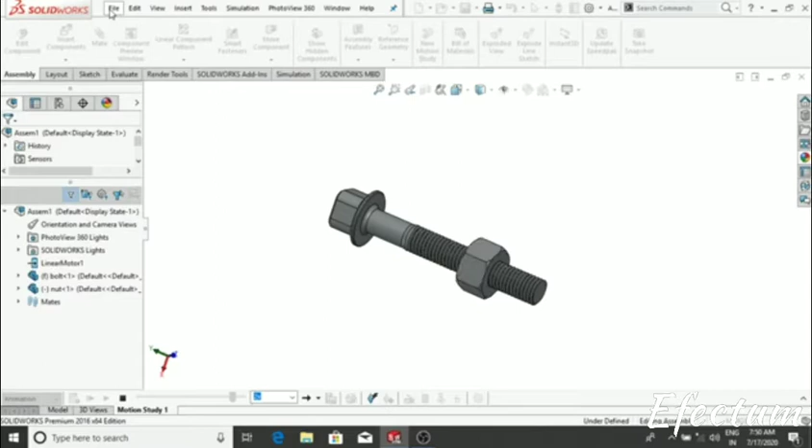So let's start the drawing. First of all, go to the file, new, select part, then OK, and we enter the SolidWorks interface.

Let's change the background to plain white. Simply click and make it plain white, and make the drawing on the top plane.

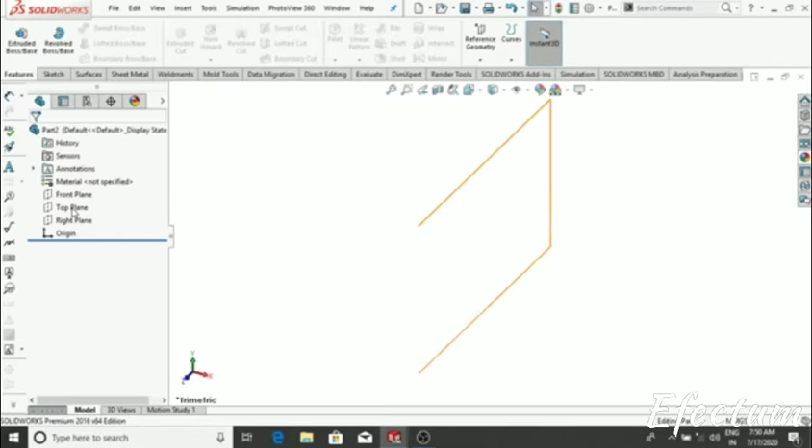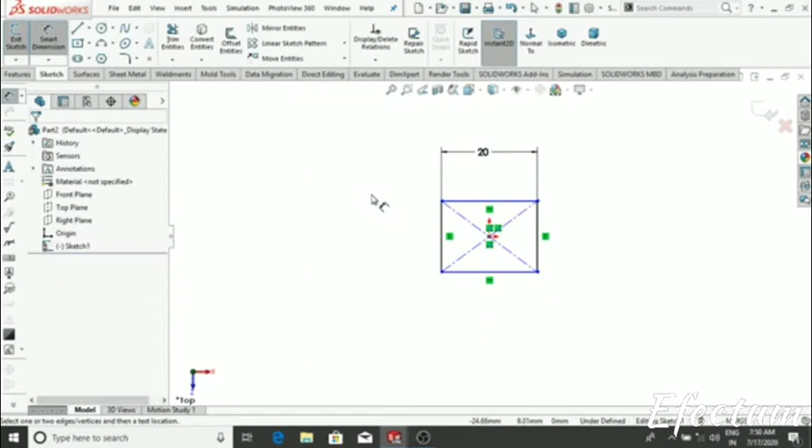Select the top plane, right click, sketch, and make the center rectangle of 20 mm into 20 mm. Simply select the center rectangle and go to smart dimension, make it 20 mm, OK, and it also be 20 mm.

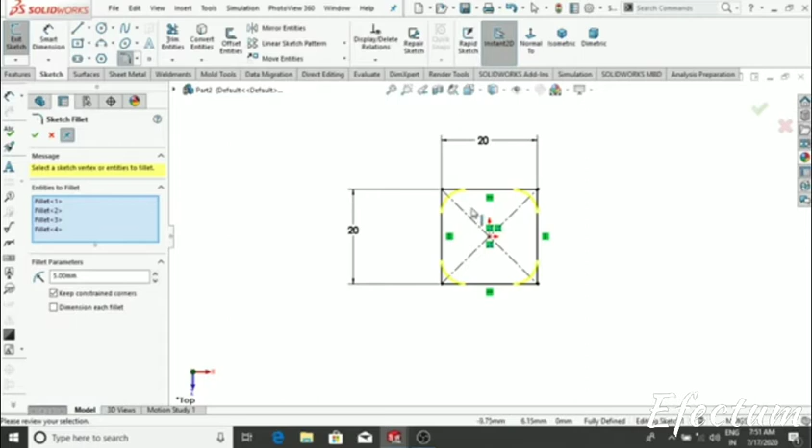Then OK, and give the fillet of 5 mm. Simply select 5 mm. If you want to select all the corners, simply drag the mouse and select this - it will automatically select all the corners, then OK.

Extrude up to 15 mm. Simply go to the feature, extrude boss base, and it will be 15 mm, then OK.

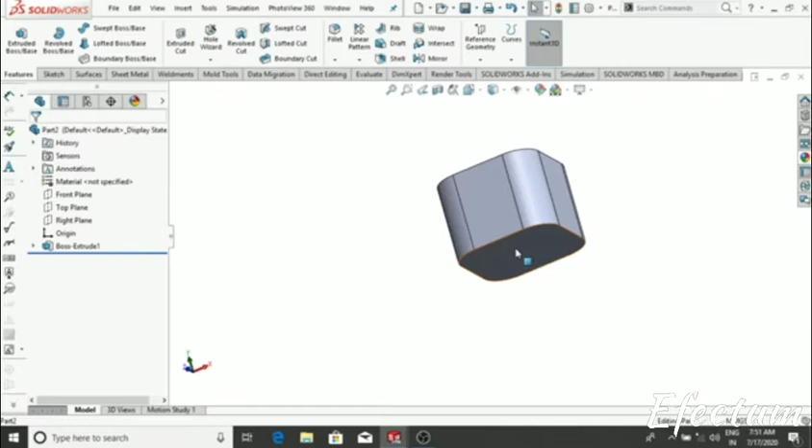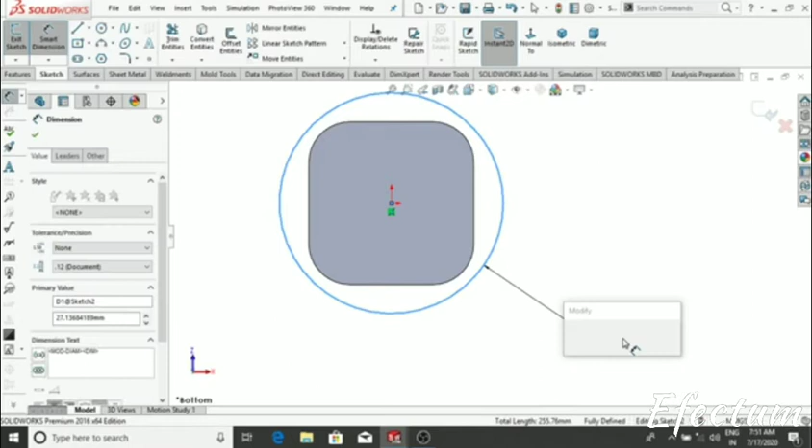Again from this face select, right click, sketch, then normal, and make the circle of 30 mm. Go to the circle and make the circle of 30 mm, go to smart dimension, and make it, then extrude up to 2 mm from this surface.

Go to the feature and extrude boss base 2 mm, and keep the merge result, then OK.

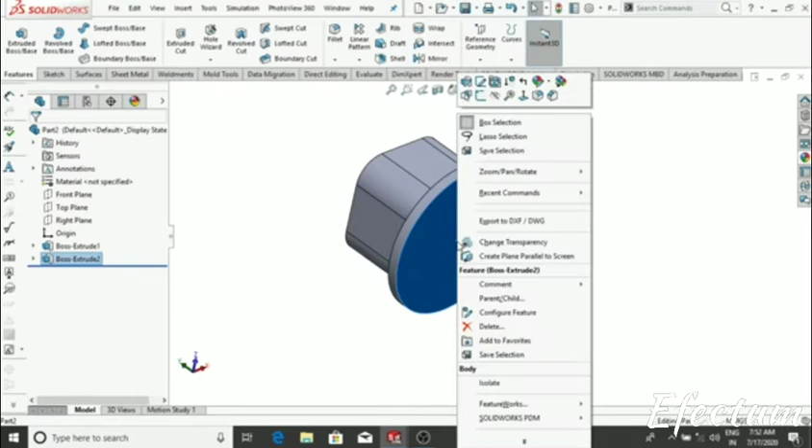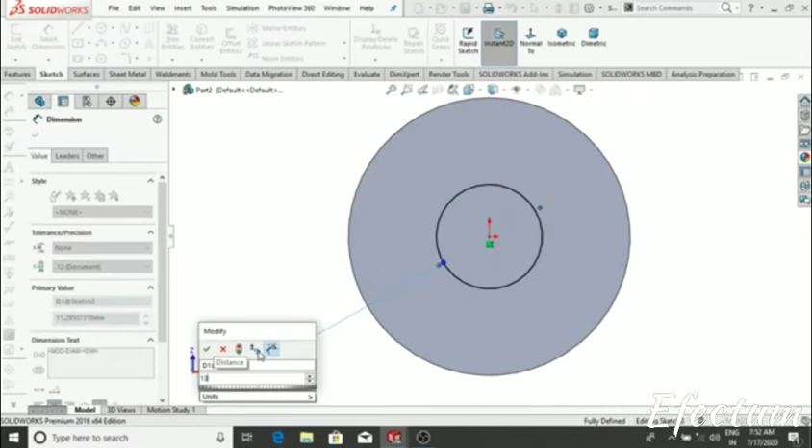Again from this surface make the circle of 13 mm. Simply select this surface and make the circle, go to normal, 13 mm. Simply select the circle and make it 13 mm. Go to smart dimension and make it 13 mm, then OK.

It's extruded up to 100 mm from this surface. Simply go to the features and extrude boss base 100 mm, then OK.

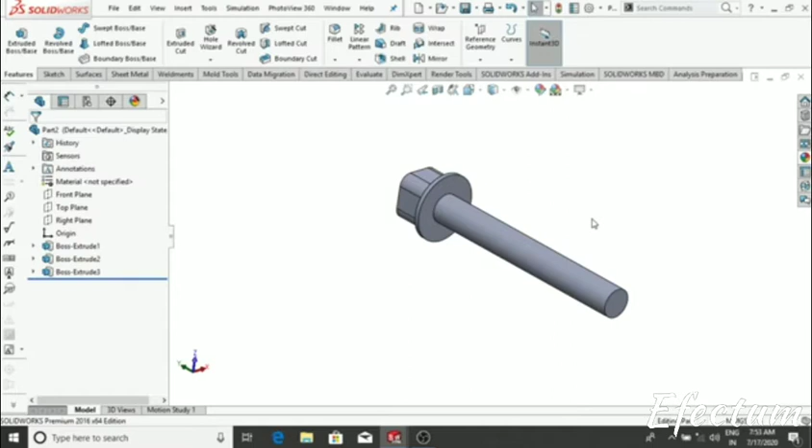Again from this surface make the circle of 14 mm, but its length will be 75 mm. Simply select this face, right click, sketch, then normal, and make the circle of 14 mm. Go to smart dimension and make it 14 mm, then OK.

It extrudes up to 75 mm. Simply go to extrude boss base and make it 75 mm, but it is reverse direction. Select the reverse direction, then OK.

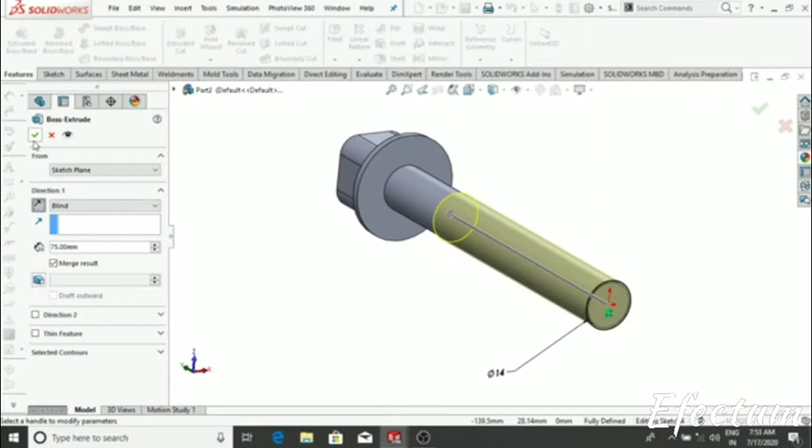Give the fillet of this line from this surface will be 1.5 mm. Go to the fillet and make it 1.5 mm on this surface, then OK.

Make this fillet to 0.5 mm. Simply select the fillet and make it 0.5 mm, and select both, then OK.

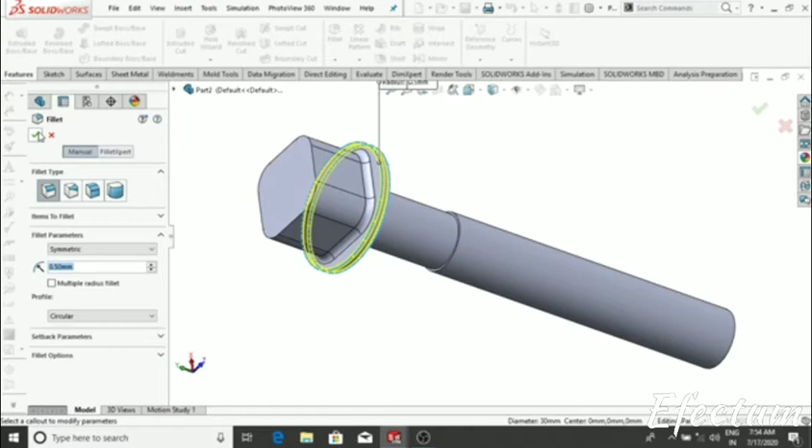Give the chamfer outward. Simply select the chamfer and make it 1 mm at this point. Simply select 1 mm and select this, then in, then OK. It will be automatically selected.

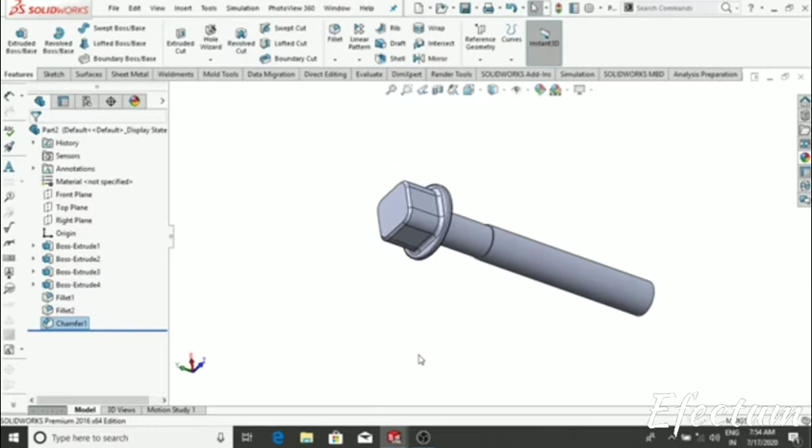After all, give the thread command to this bolt. Simply go to the hole wizard and select the thread.

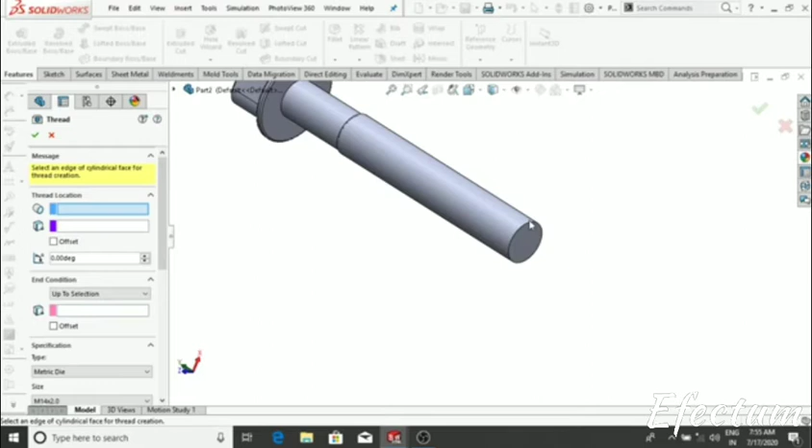Now thread location, simply select this corner, then OK. It will be M14 into 2.0 - it means the pitch between the threads will be 2 points and its diameter will be 14.

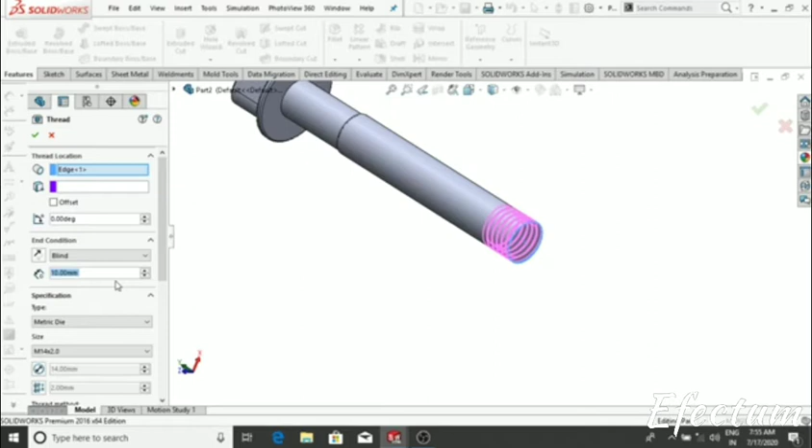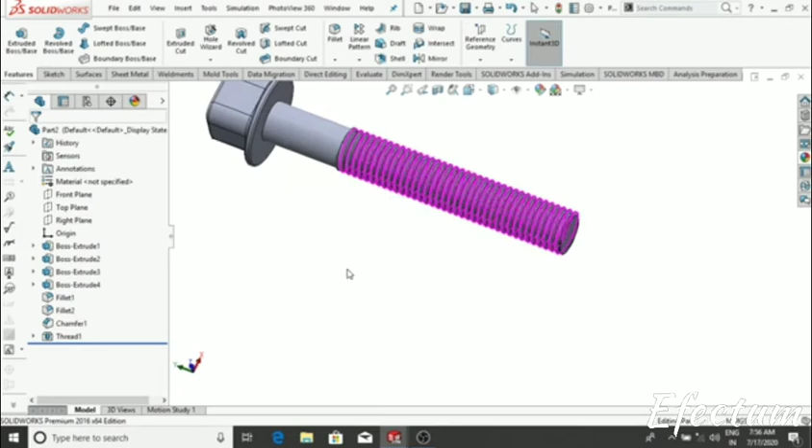Simply select blind and make it 78 mm. Select 78 mm and give the offset of 5 mm, then OK, but it is reverse direction, then OK. It will be thread from this surface, and again from this surface I will make the extrude through all.

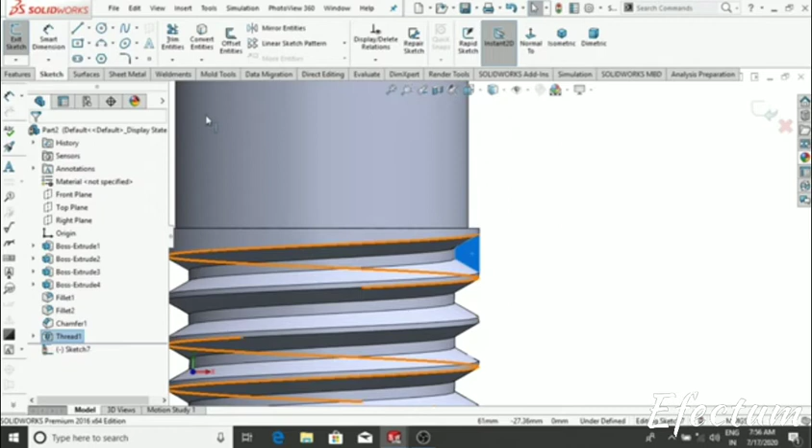Simply select this surface, right click, sketch, then normal. If you want to make this convert entity, simply go to convert entity - it will select the line from this surface.

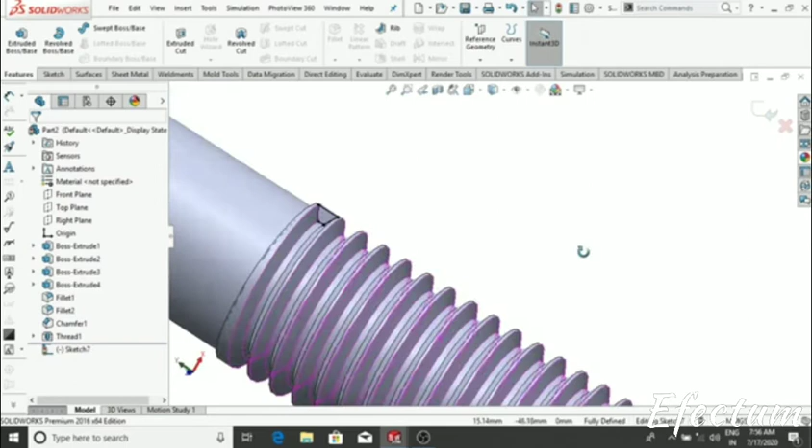Go to the feature and extrude cut through all. Go to the feature and extrude cut, select this through all, then OK. It will be cut from this surface, so OK.

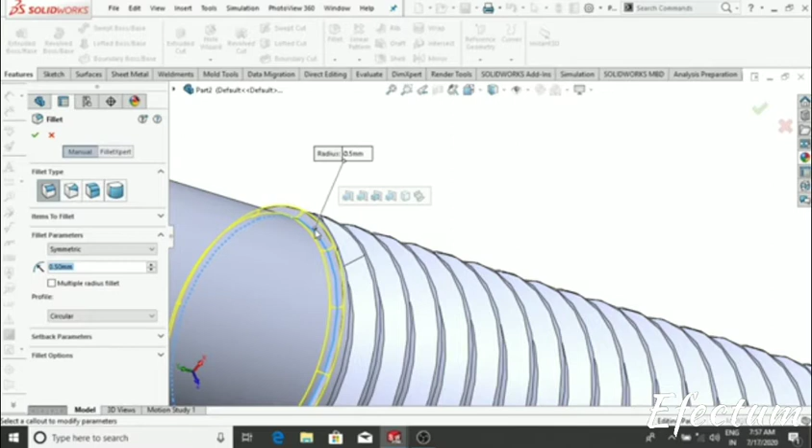Make the fillet from this surface 0.5 mm, then OK.

Again give the fillet from this surface. Simply select the fillet and make the fillet 2 mm, and select this corner, then OK.

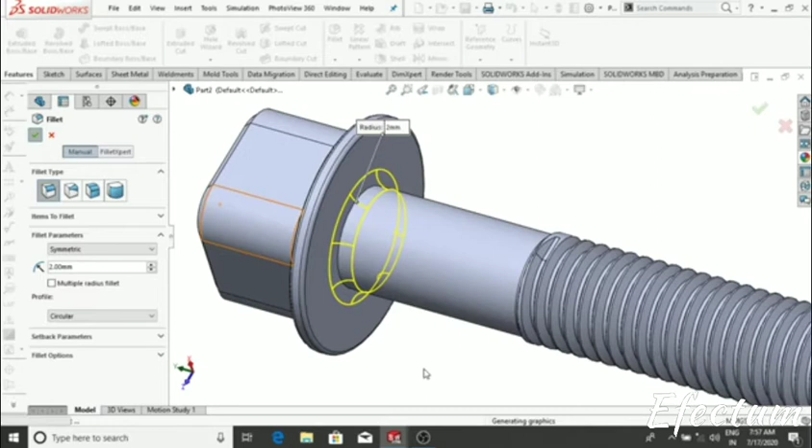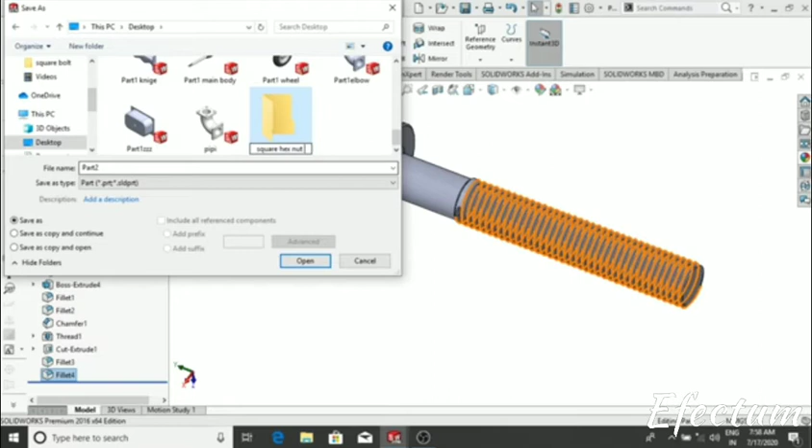Again we design the bolt, so simply design the nut. Save this first. Go to the file, save as, go to desktop and select the folder, make it square hex nut bolt, then OK, and it will be bolt, then OK.

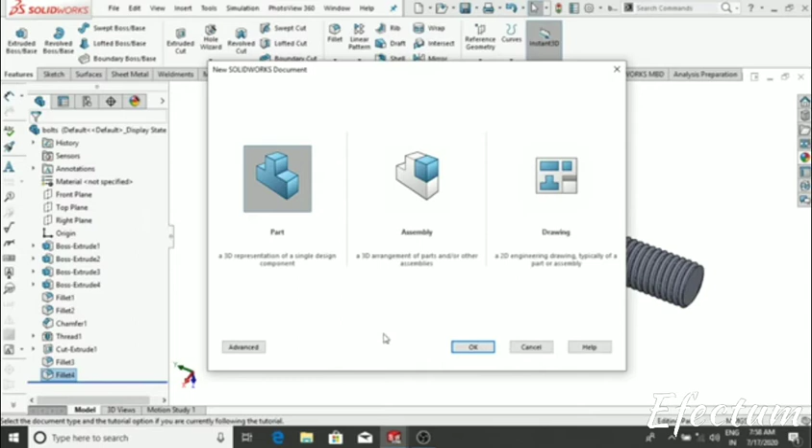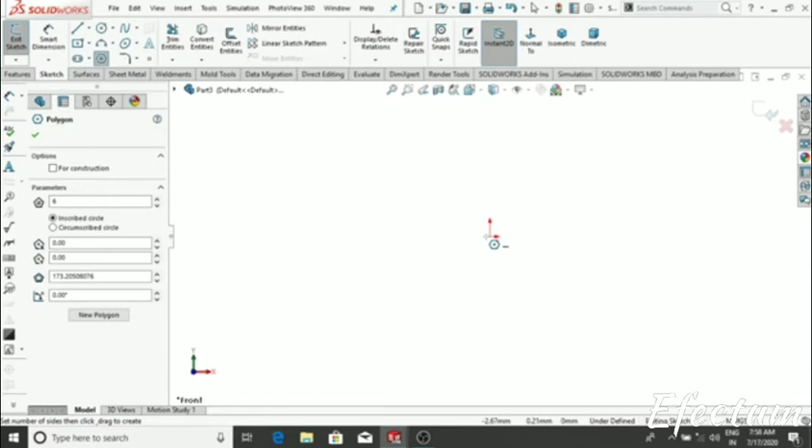So again make the nut for this bolt. Go to the file, select new and make the part, then OK. Change the background to plain white, select the front plane, sketch, then normal, and simply select the polygon. Number of parameters will be 6 and make the polygon. I think it will be horizontal.

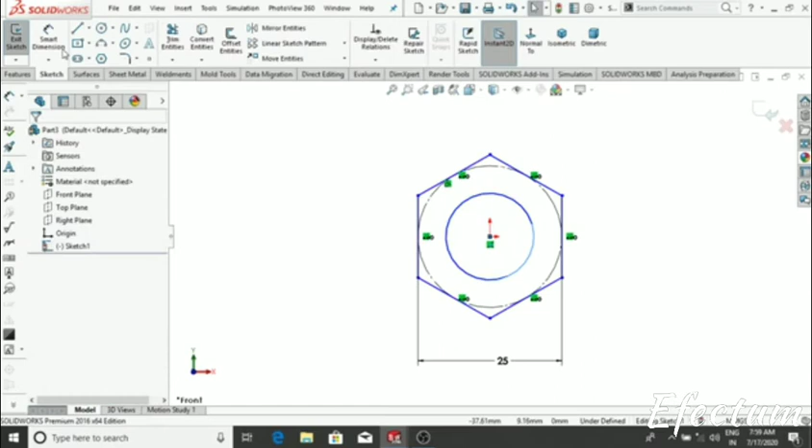Select this and make it horizontal, and the distance between the polygon between two lines, select the smart dimension, and from this point to this point will be 25 mm. Select 25 mm and make the circle from this point will be 14 mm. Select this, go to the smart dimension and make it 14 mm, then OK.

Again extrude it to 15 mm. Simply go to the features, extrude boss base, 15 mm, but it will be from mid plane, so select the direction will be mid plane, then OK.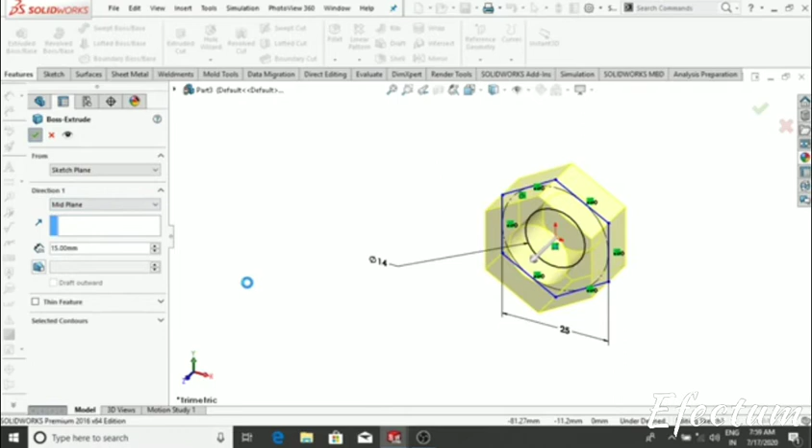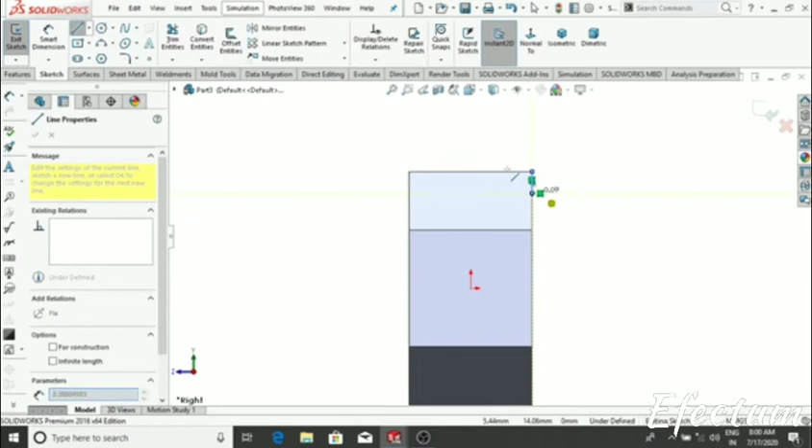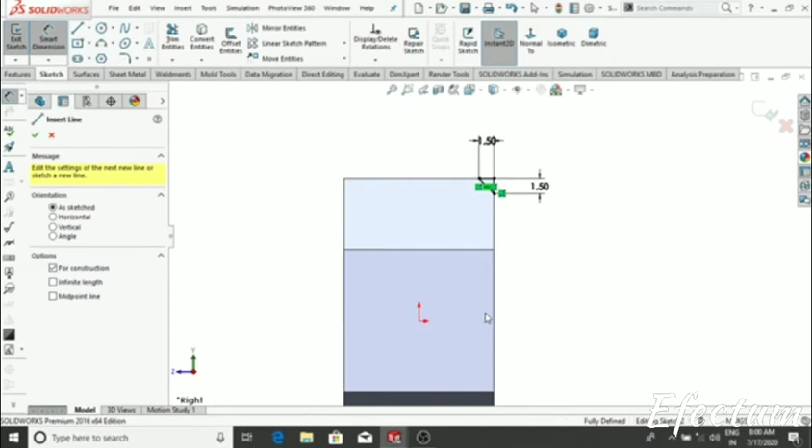Then select the right plane, right click, sketch, then normal, and make the cutout from the corners 1.5 mm. Select the line and make it, and go to the smart dimension and make it 1.5, then OK, and it also be 1.5, OK. Make the center line from this axis because it helps to revolve cut. Go to the feature, revolve cut, select automatically this axis, then OK.

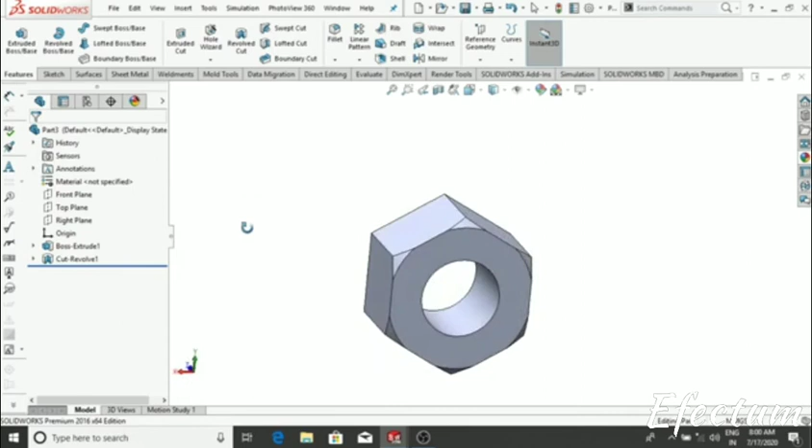If you want to mirror this cut, revolve cut two, simply go to the mirror and select the front plane and features to mirror, select this revolve cut and then OK, it will be mirror.

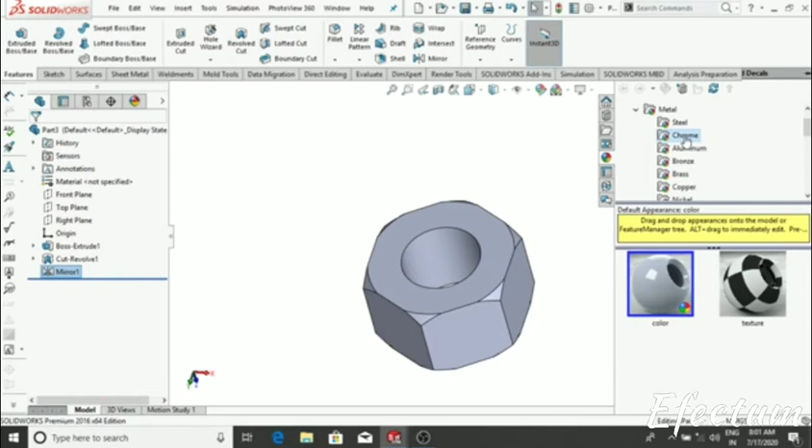Then if you want to apply the material to this nut, simply go to the appearance and select the metal, select chrome plate, then OK. We also give the appearance for this bolt, select this and make it chromium plate, then OK.

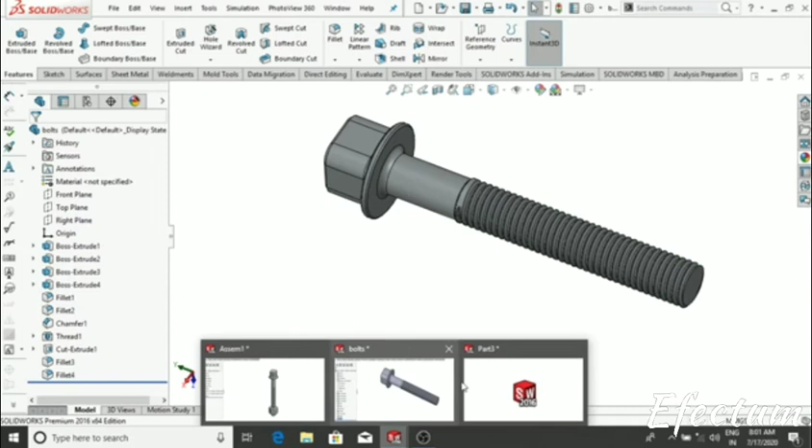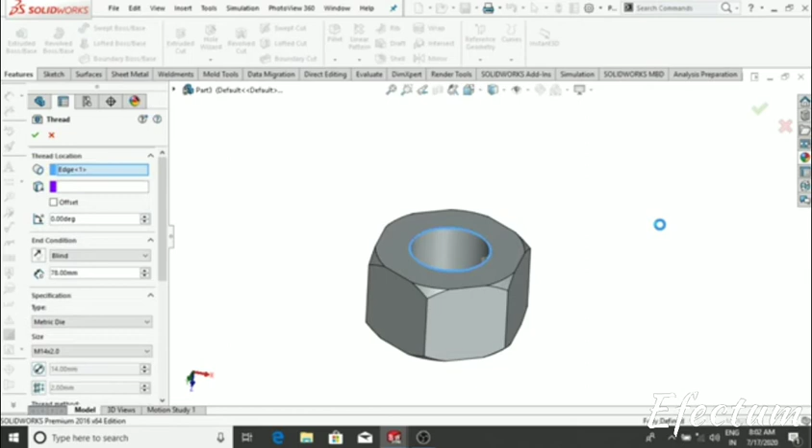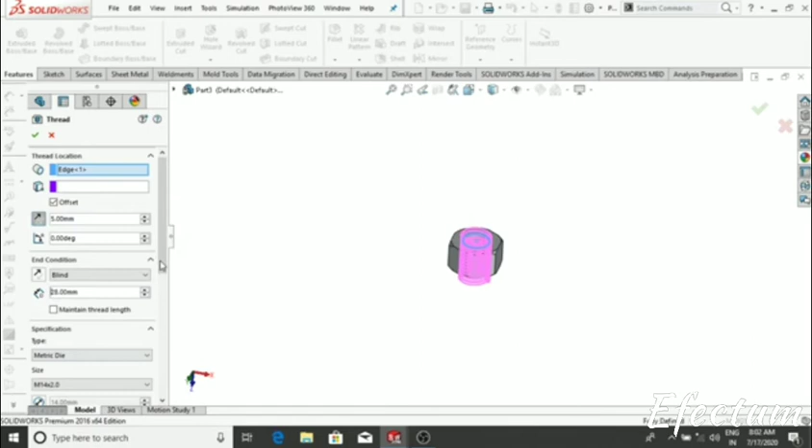Again give the thread to this nut, go to the features and hole wizard and go to the thread, select the location, select this. It will be more, so click this and make the offset of 5 mm, but it will be reverse, and give this and make it cut extrude, then OK.

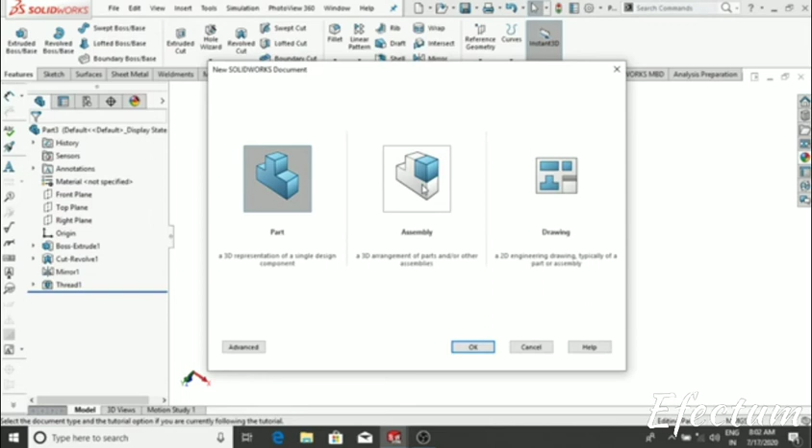Then it will be extruded cut from this surface, and we make the animation for this nut and bolt. Go to the file, new, and make the assembly for this nut and bolt, then OK.

We entered the assembly features in SolidWorks, select the bolt, drag it, and change the background to plain white, go to the insert components, click browse.

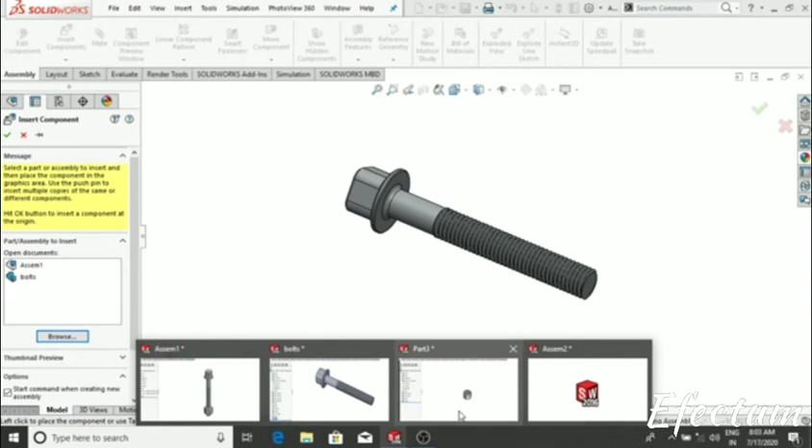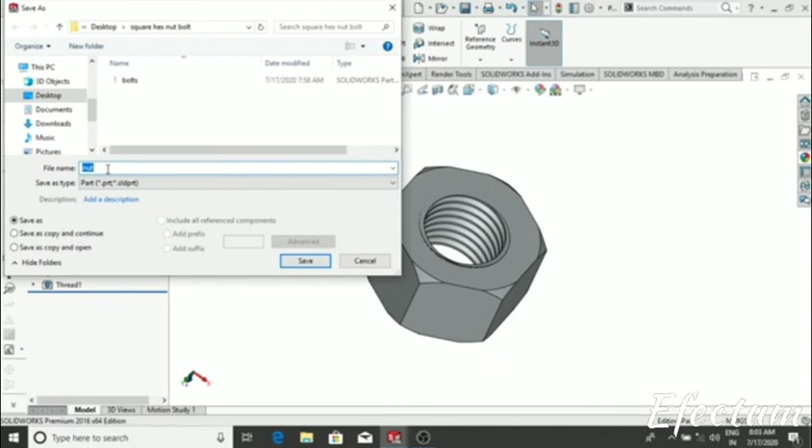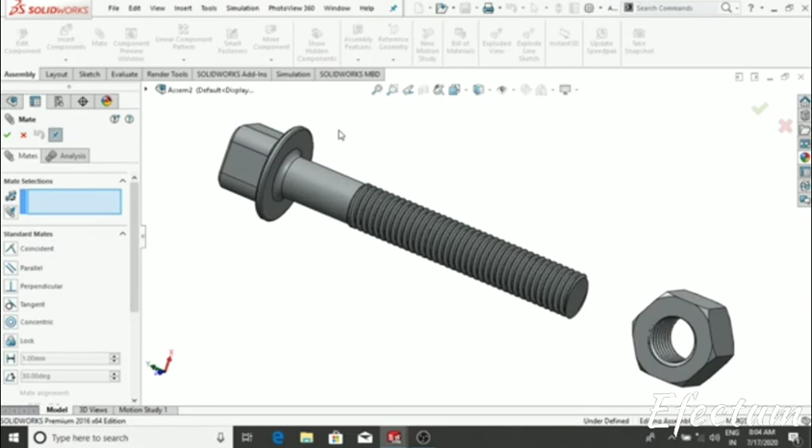Go to the assembly and go to the insert component and select this to this, and go to the mate, select this circle, and again select this circle, it will be concentric.

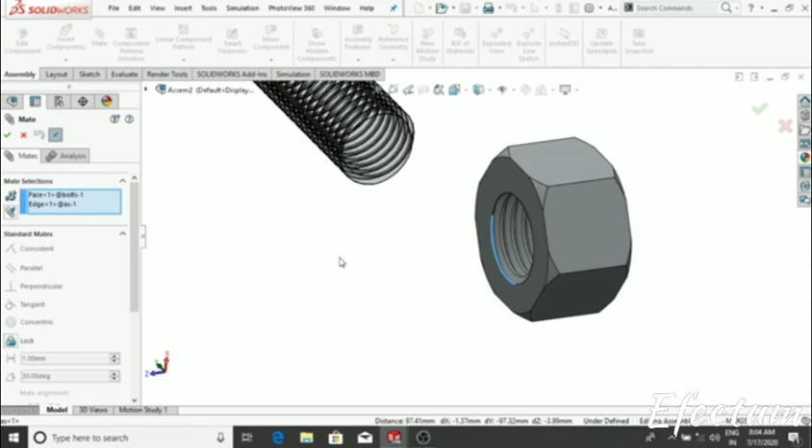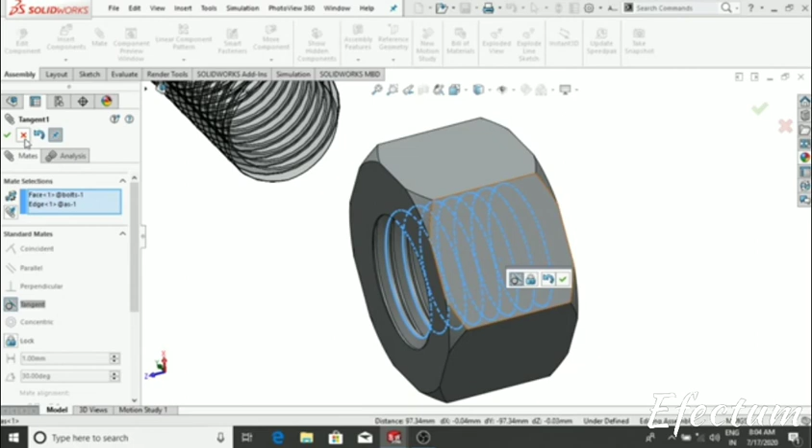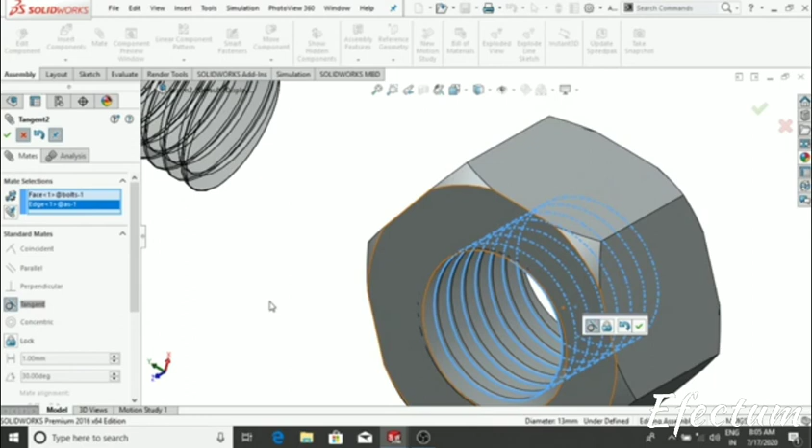Go to the mate, select this and select this. Sorry, it will not be selected the circle of this.

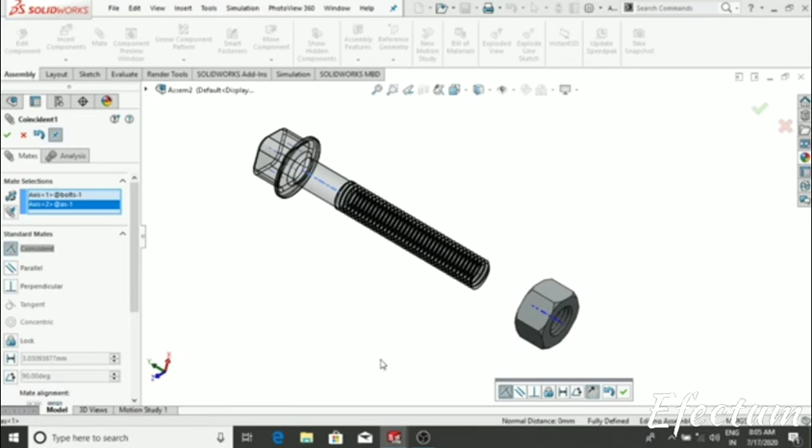So we have one method: simply select the view axis, temporary view axis. It will really help you. Go to the mate and select the axis and again select this axis. It will be coincident, then OK, and select this to this.

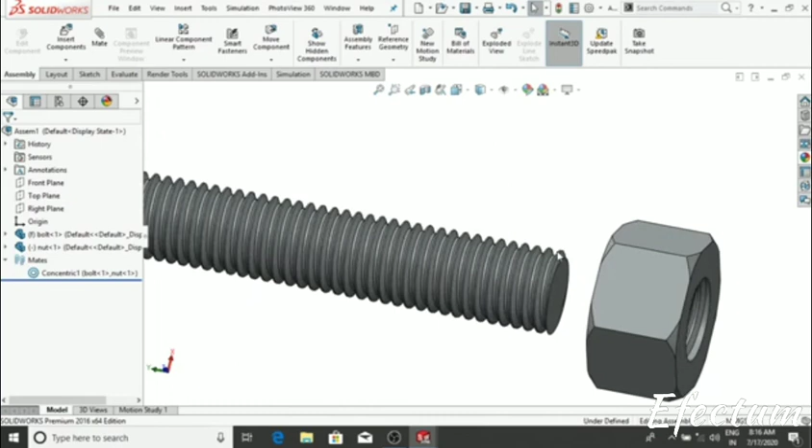Again, if you want to make the animation for this, simply select this nut and bolt. Go to the mate and select the mechanical mate and select the screw.

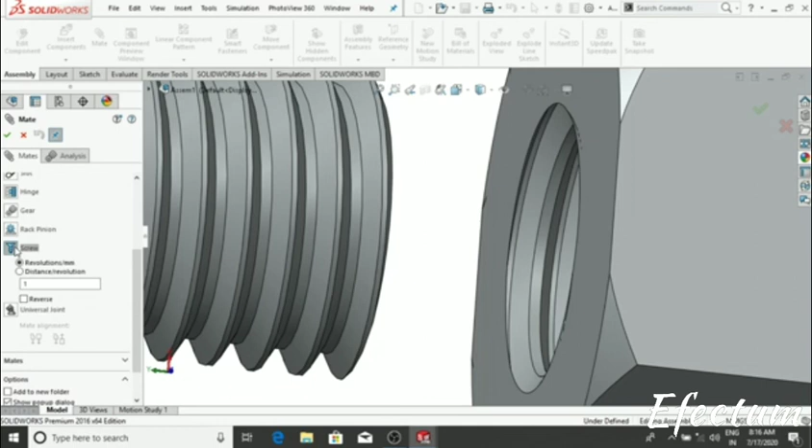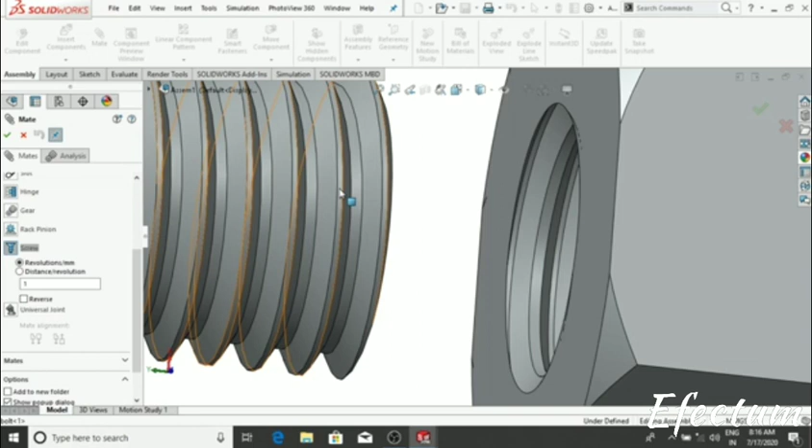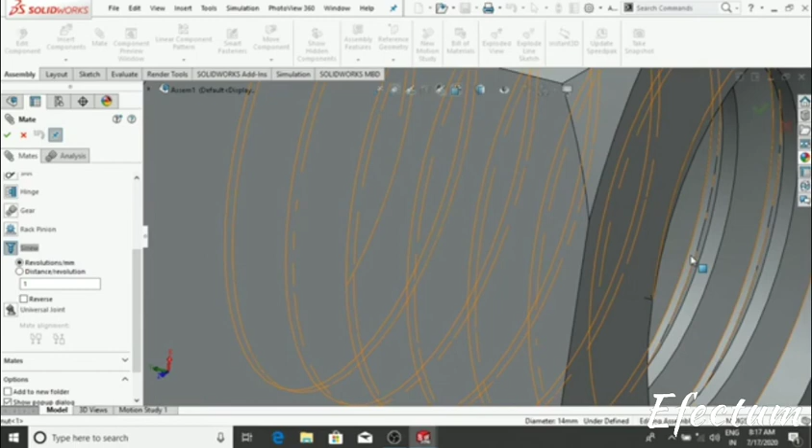Select the upper of this bolt. It takes more time. Again select this surface. Just takes more time to select this, and it is selected.